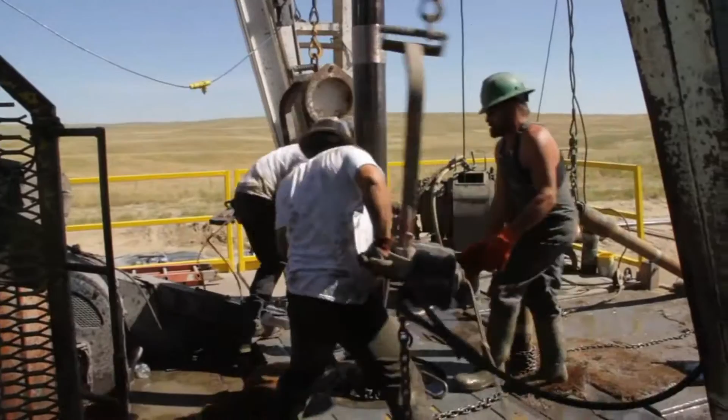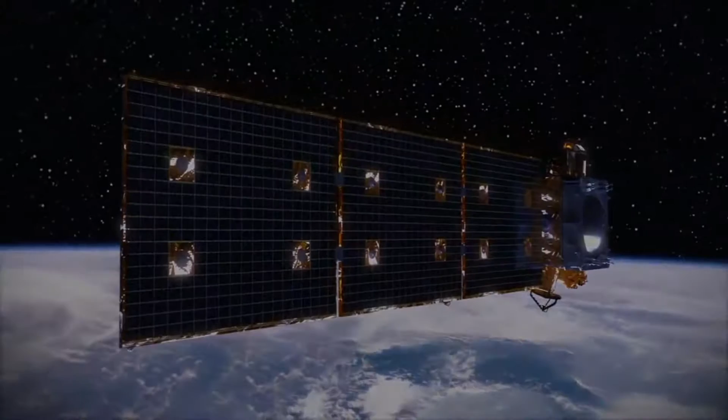The world you know. How well do you really know it? I'll show it to you. Everything you know, and everything you don't. Everything you want to know, and everything you don't. So let's get started.

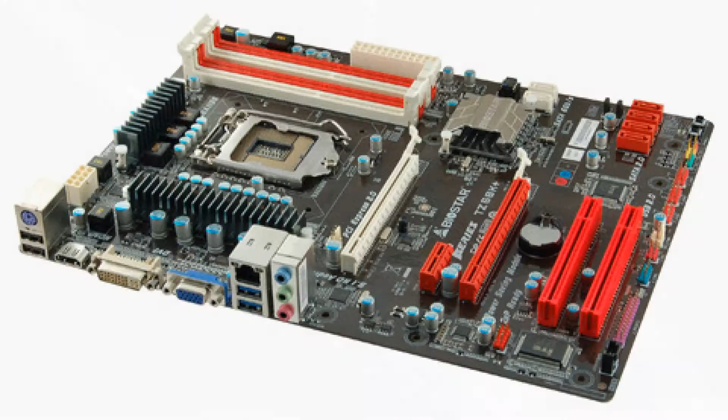You're watching this on either a computer or your phone right now, an illusion put up on an LED screen, controlled by transistors and powered by electricity. Over 150 years ago, we figured out how to force electrons to flow through a wire, and that has changed everything.

We can light up any darkness, and all we had for all of history was lanterns and the tiny flames of candlelight. Air conditioning and heating: you can set your home to whatever temperature you want, when all we had for all of our existence was the ability to huddle around fires when the winter came. Refrigeration: you can preserve whatever food you want to have whenever you want.

You can get on a computer or a phone. You can learn whatever you want, talk to whoever you want. In the past, you had to rely on couriers on horseback, or for letters to be carried across the sea over the course of months.

In the past, all of this was all there was. But we don't live in that world anymore. You've never felt it, you've never seen it, and you can't even imagine it, no matter how much I describe it to you. And neither can I. So how does everything we know come about?

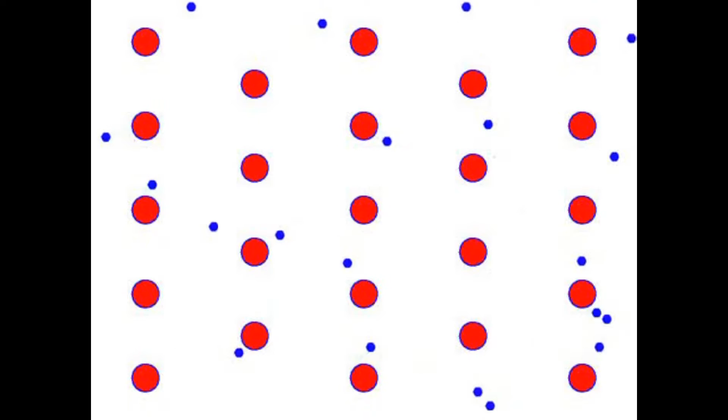Metal. Metal and magnets. Most metals don't have all their electrons on lockdown like other elements do. No, they float around them like a sea. And in copper, they're particularly loose.

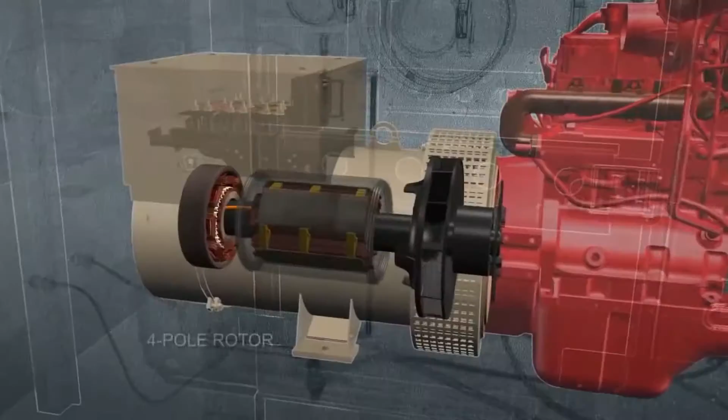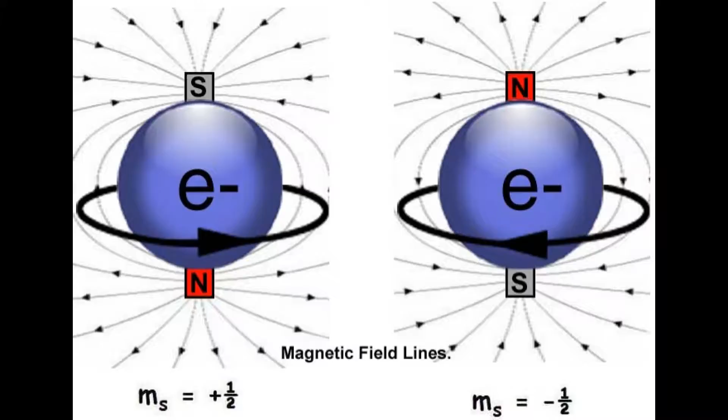So you coil it by the ton, seal it onto the rotor, and then you spin it, spin it in between two magnets. And when it spins between those magnetic fields, well, electrons have charge, and they're floating free, and the law of magnetism stands absolute. They have to move. They go racing along the wire, compelled by the laws of this reality to hurtle towards the opposite end.

So then we run the wire out through the power plant, out through the city, into your home and back again. So the electrons have to follow the wire, and the wires lead through your lights, through your TV, through your fridge, your oven, your computer, hot water heater, air conditioning, even your phone charger. And as the electricity goes racing through them, it all comes to life.

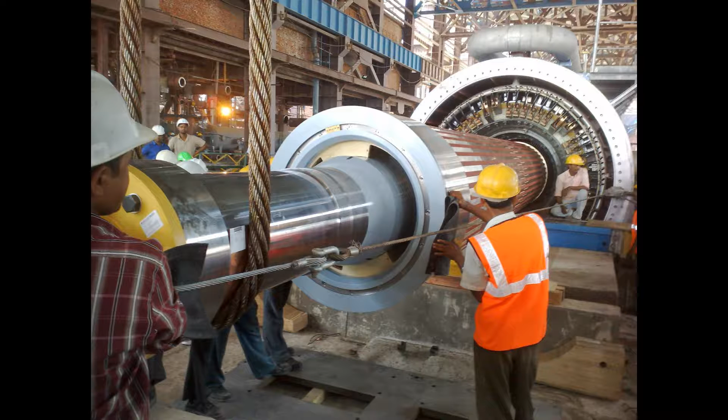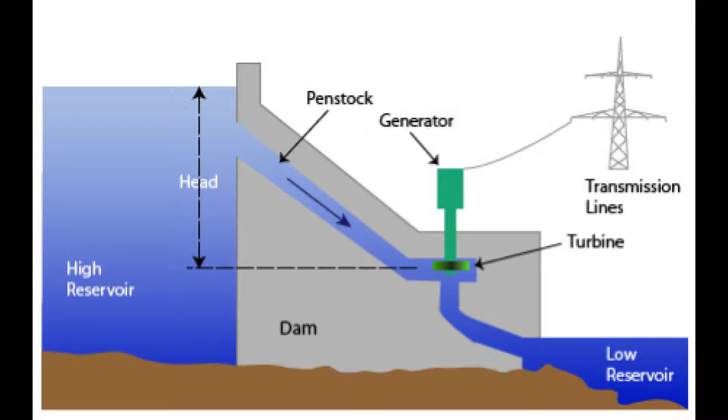So how do you turn hundreds of tons of copper over and over again all day long? Methods vary. The very first thing we ever tried was essentially giant water wheels connected to a generator, and eventually these gave way to dams. As long as the flow of a river is strong enough, the water moving through will turn a turbine, and the turbine spins the coils inside the generator.

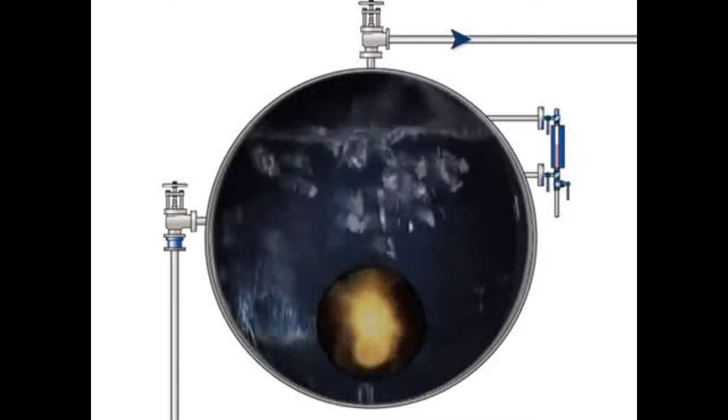But this only works with a river, so what about everywhere else? Well, we burned stuff. We'd already learned how powerful steam could be at high pressure, propelling locomotives and steam engines for the longest time, so we just applied the same principle. We feed coal into a furnace underneath a water tank, constantly keep it filled, and the fire burning keeps the water boiling. Steam keeps rushing out, and the turbine keeps spinning as the steam goes through it.

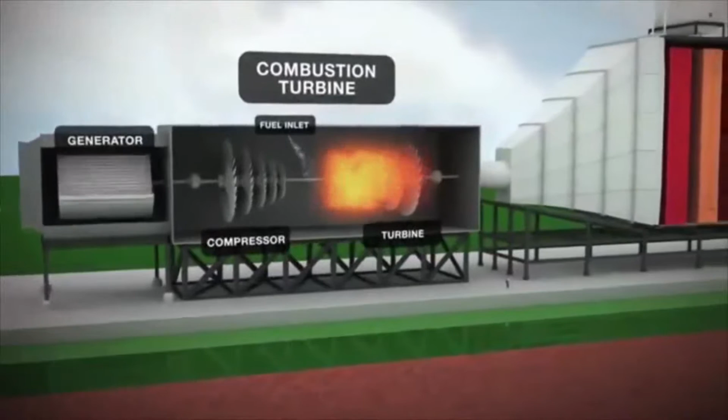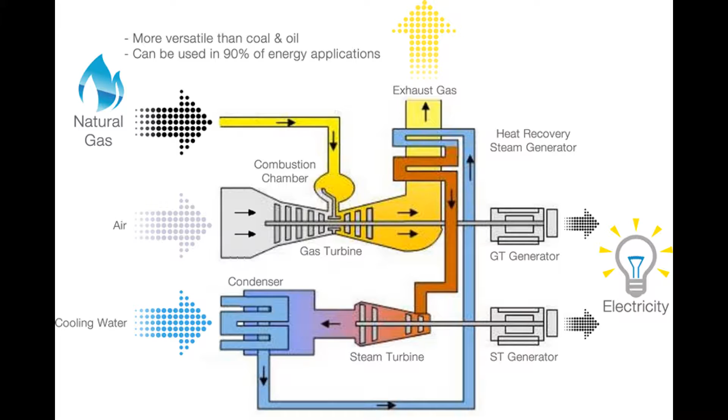We do pretty much the same thing with natural gas, just with an extra twist. Shoot out a jet of burning gas, and the superheated air expands so fast, and then it's forced to rush through the confined space of the turbine. So it spins the turbine and spins the generator. Then the hot air is stopped up to transfer its heat to the water. Then you know what happens once the steam's generated. We also went nuclear.

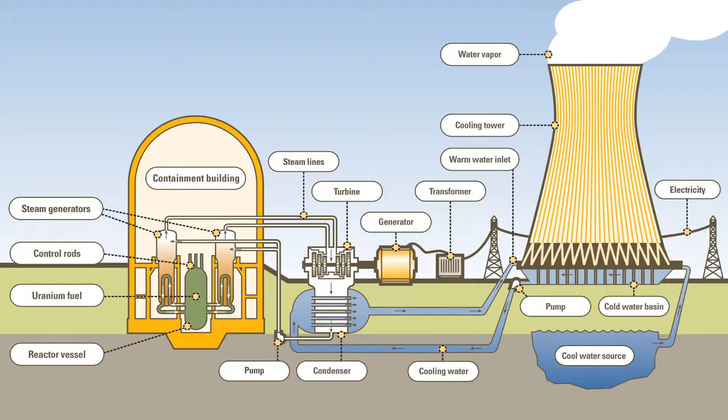Align some uranium rods, trigger a slow fission reaction, then just seal the reactor. The reaction heats the rods to almost 1,000 degrees, and then just surround them with water, because you know what happens after that.

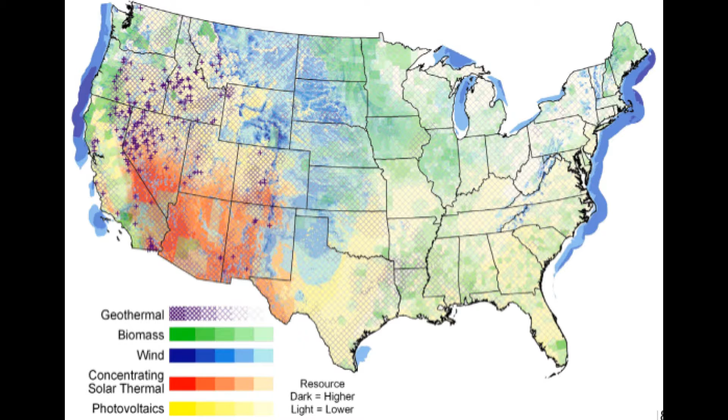Recently, we also tried getting into wind. It essentially works the same as hydro. If the wind's blowing strong enough, it'll turn the blades. The blades will spin the coils, and you know what happens from there. However, it's only viable in areas that experience strong wind on a regular basis.

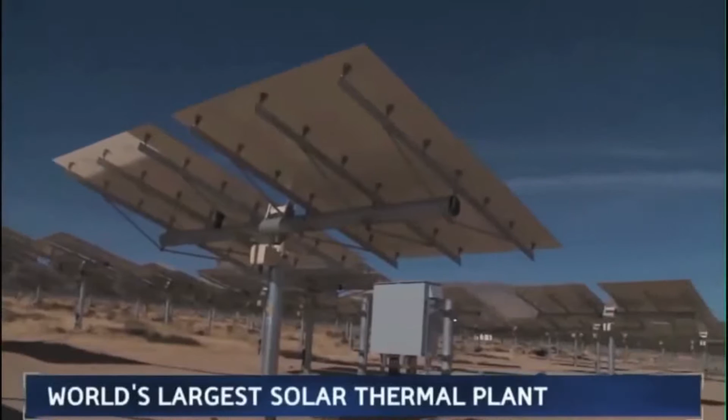We've even started trying out solar thermal, where we align a bunch of mirrors, hundreds, thousands even, to reflect as much sunlight as we can onto a tower that we pump water up into. When all that sunlight's focused, the tower superheats. The water boils in it, and the steam's given one direction to go, through the turbine. But the obvious issue is this only works in places with abundant sunlight, year-round sunny days, stuff like that.

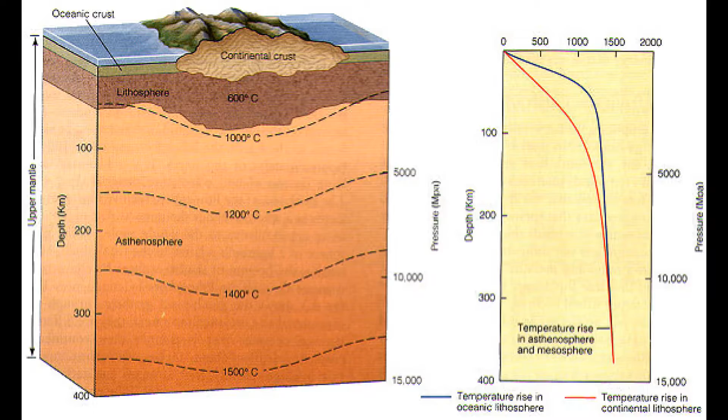Some lucky places like Iceland that sit on top of really geologically active regions of the Earth get to use something called geothermal. They drill two holes down to where the Earth is several hundred degrees, which in most places you'd have to go miles down to get that hot. But in places like Iceland, you only have to go a few thousand feet. So they flush water down one hole, and boiling superheated steam comes rushing up the other, straight into the turbine. So what's the fair share of each of these?

Well, the majority of electricity worldwide is generated by burning coal and natural gas. Nuclear power and river dams make up almost the entire rest of it, and almost everything else barely makes a mark. Every one of these routes to production gives you the same end result, but all of them carry different considerations.

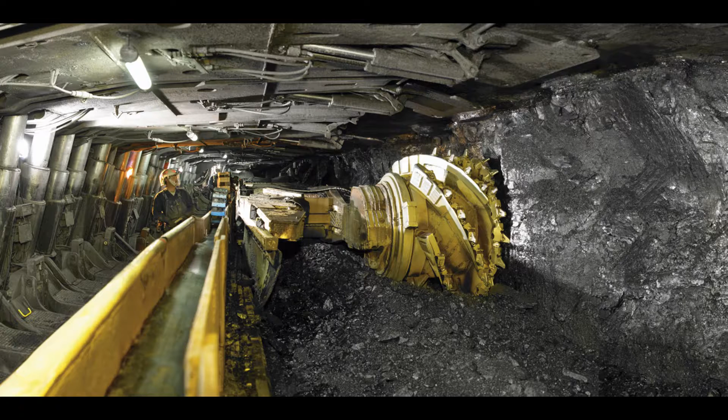Wind and solar power are only available in specific regions, and they're not completely reliable. Burning coal and natural gas gives off emissions. As long as we're willing to mine it, there's enough coal for centuries, even a millennium. But natural gas is far less abundant, and we're using it up far more quickly.

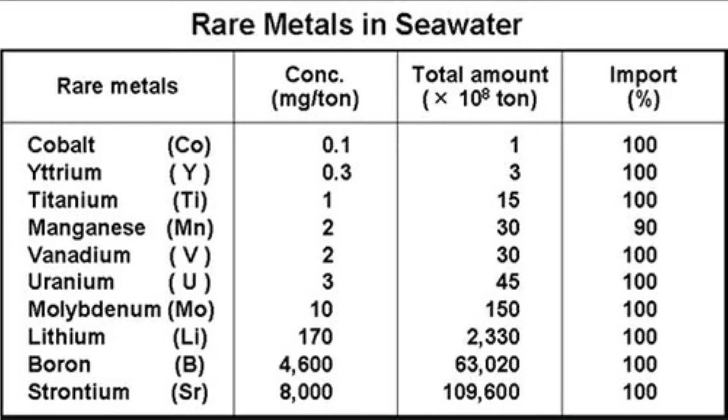Nuclear power doesn't generate any emissions, though it does leave hazardous waste that needs to be guarded. With a combination of thorium reactors and extracting uranium from seawater, nuclear power can remain an option for several millennia to come.

In theory, you could deplete the heat in a particular area of the Earth's crust, but this would take tens of thousands of years, giving geothermal an effectively indefinite reliability horizon, though it's also restricted to certain areas and regions.

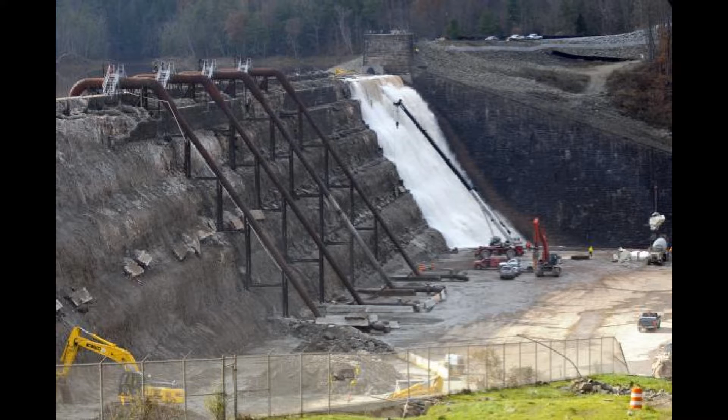With regards to human timescales, rivers will essentially always be there, but their dams have to be repaired and maintained, and even with as much, still need to eventually be replaced and rebuilt every century or so.

Nothing's perfect, but if you want everything you know to function every day, you have to pick one. One way or another, they're all a part of the world you know.